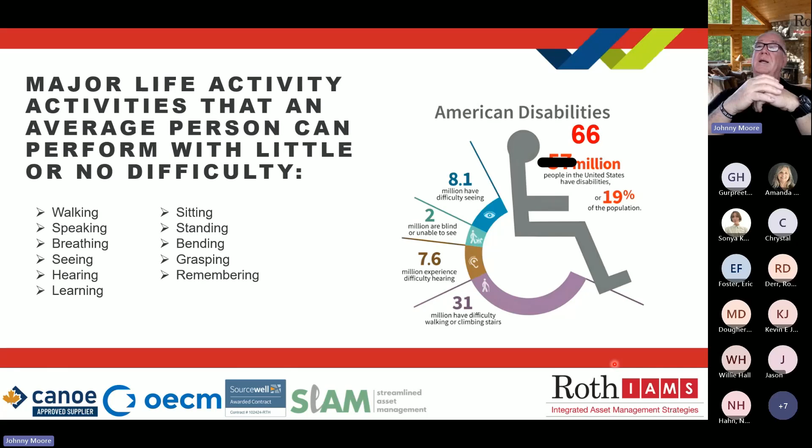Those major life activities that we all take for granted, walking, speaking, breathing, seeing, all of these, you can see there's a lot of different life activities. And if you've got a physical impairment that is limiting you, you need to have your rights protected. And it's important to understand that there's quite a few of us that have these limitations. At last count, there were 66 million people in the United States that were deemed as having some form of disability. That's about 19% of the population, and that number is growing daily.

Understanding that the U.S. Code is the code of laws in the United States that is the official compilation and codification of the general and permanent federal statutes in the United States that govern the ADA codes. The U.S. codes, there's 5 of them primarily. Again, the ones that I'm going to focus on are Title 2 and Title 3, which are basically the built environment.

This is going to be an example of some of the items that are in each one of the chapters of the ADA Bible, the 2010 ADA Standards for Accessible Design. And it's important to understand that that is the most recent code change version that we have. That's the one we are working with. Chapter 1, Application and General Scoping. It talks about the interpretation of what the ADA is. It discusses the accessibility to sites, buildings, facilities, and all the different elements.

First thing people are going to say, especially if they're responsible for a building, much less own a building, they're going to say, well, wait a minute, what about the ADA grandfather clause? I used to be grandfathered in. Well, in the old days, you did with the first ADA code that came out in 1992 and the revised version that came out in 2004. There were exclusions or grandfather clauses that said that if your building was built prior to that, you didn't have to worry about being ADA compliant.

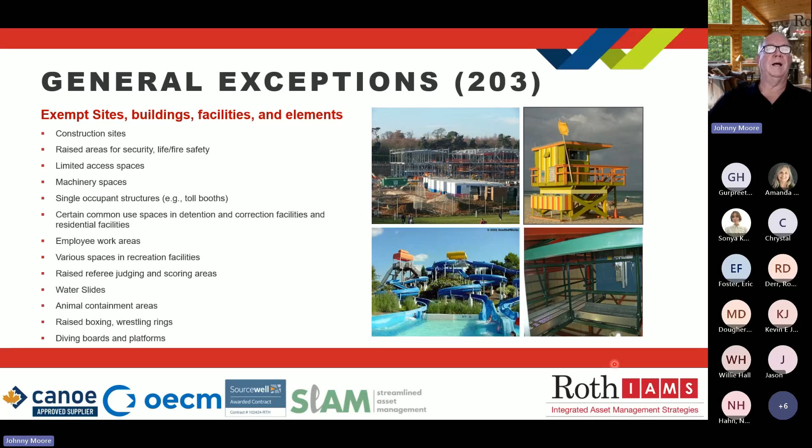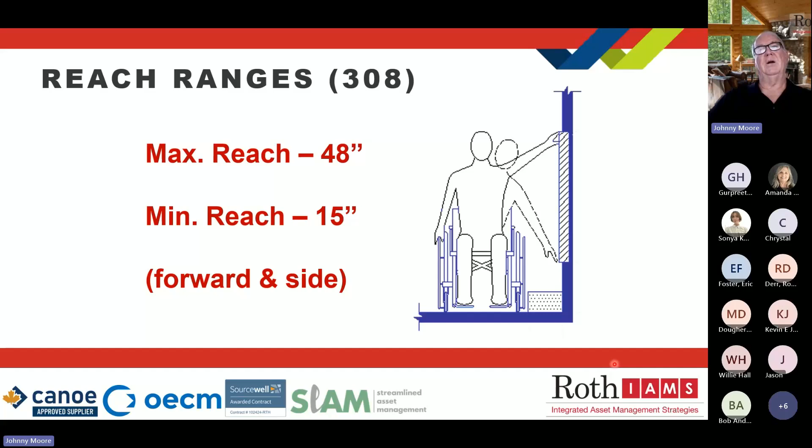There's always exceptions. Building blocks, chapter 3, they're going to talk about some of the important things like the reach range. It's important to understand that if you can learn the basic dimensions and the criteria pertaining to different code criteria items in the ADA, things like the maximum reach range of 48 inches, the minimum reach range of 15 inches, that will help you learn how to look for code items that you need to pay attention to.

There's always variations. Obviously, if you are in a wheelchair and you are in an area where you have an obstacle like a bookcase that is only 10 inches wide or less, you're going to have that maximum reach capability of 48 inches. However, if you're leaning over a cabinet or an item that's 24 inches wide, then that reach range is going to lower down. You're only going to have 46 inches.

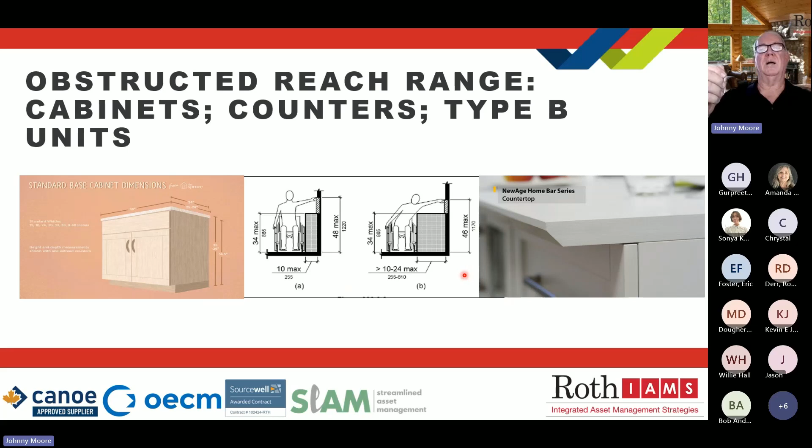Operable parts, protruding objects. They talk about the fact that if you are physically challenged in the way that you have vision limitations, then you might be using a cane. You might be completely blind. People will do what's called wall surfing. They will walk along a wall or some object that they can put their cane against and use that as a guide for walking down a walkway or an accessible route.

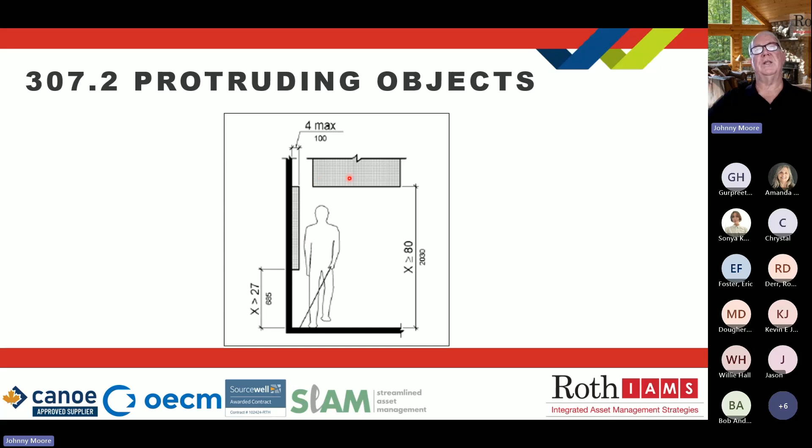If you have an object that is above 27 inches up to 80 inches and it extends out more than 4 inches, as you can see, it could hit the individual as they are walking by. That is called a protruding object. They also have protruding objects that come in the form of overhead barriers like you see here. Protrusion limits only pertain to the items that are directly in the access route.

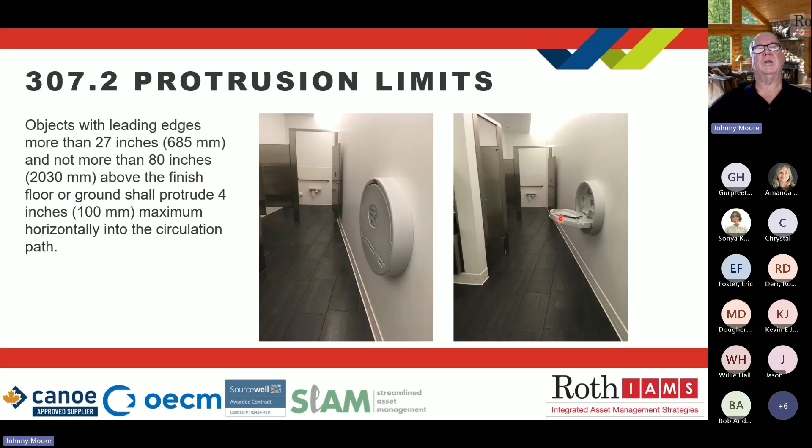So here you see a baby changing table. You say, well, that's probably less than 4 inches, so it's okay. Well, if you fold that baby changing table down, it now becomes a protruding object. So you have to really focus on a lot of these items and understand that it's not just a matter of what they are, but where they are. If they are on a circulation path in the accessible route and they stick out more than 4 inches, then that is a protruding object.

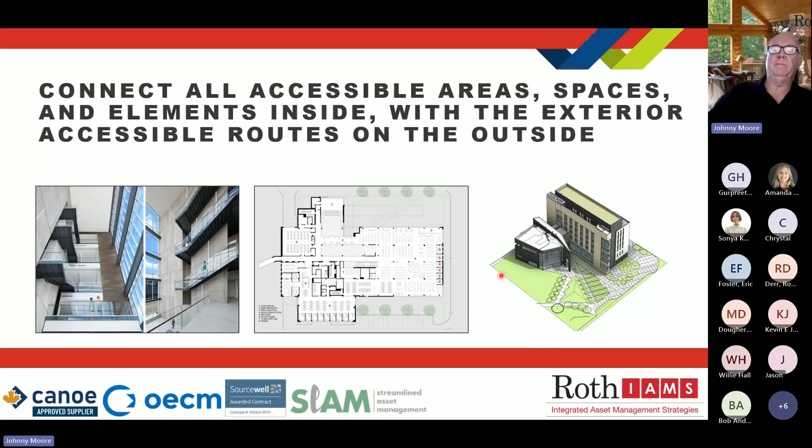Chapter 4, the accessible routes. This is where it starts getting interesting because you're trying to figure out how you're going to get the public out from the parking lot and the drop-off points of public transportation like bus stops. How are you going to get those people safely into a building or facility? When you talk about that accessible route, it has to be on what's classified as a flat, level, and secure surface. You can't have any loose areas like gravel or anything like that. You have to have a flat, level surface.

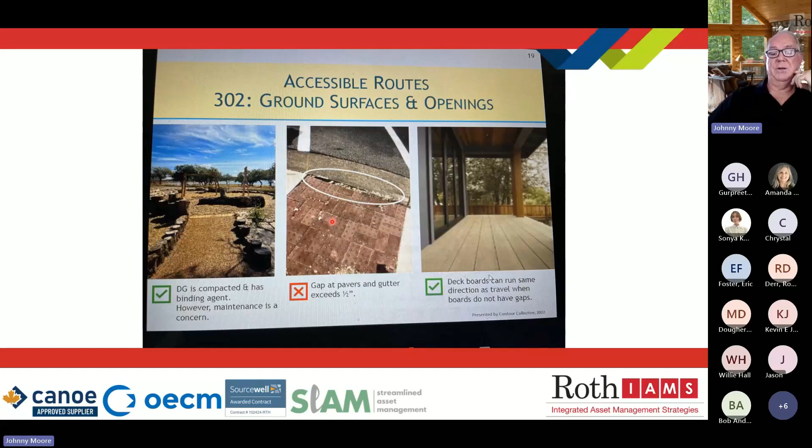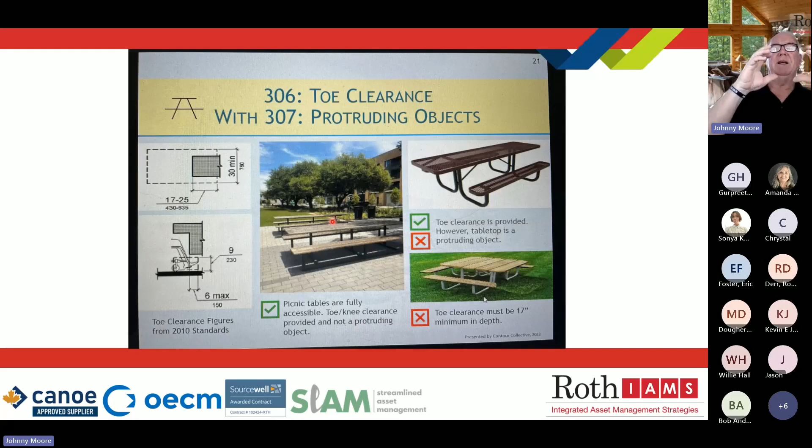You can't have grooves that exceed 1/2 inch in width. If you have gaps between different materials like the brick pavers here in this concrete strip, that is too wide. That is a gap that is not allowed. So again, all I'm trying to do here is demonstrate that there are a lot of things that you have to think about when you're looking at providing a safe, accessible route for people from the outside to the inside.

One of the things that you can do to assist you in understanding that concept is to envision being inside a big cardboard box that is 30 inches by 48 inches in width and depth, and then 84 inches in height. Basically, that is your overall safe zone. That is the clearance criteria in 99% of all the criteria listed in the ADA code.

Now imagine moving that box around a site. Try going from your car inside the building, inside that box, and think about the things that you're going to hit or that are in your way or don't provide you a flat level surface to be able to negotiate that route to the inside.

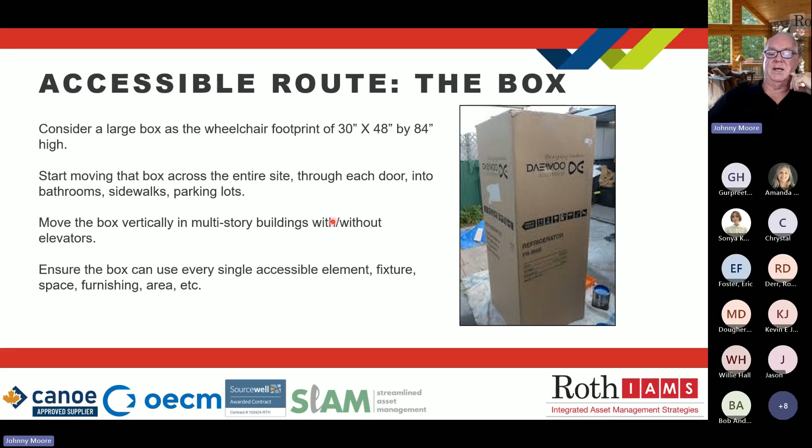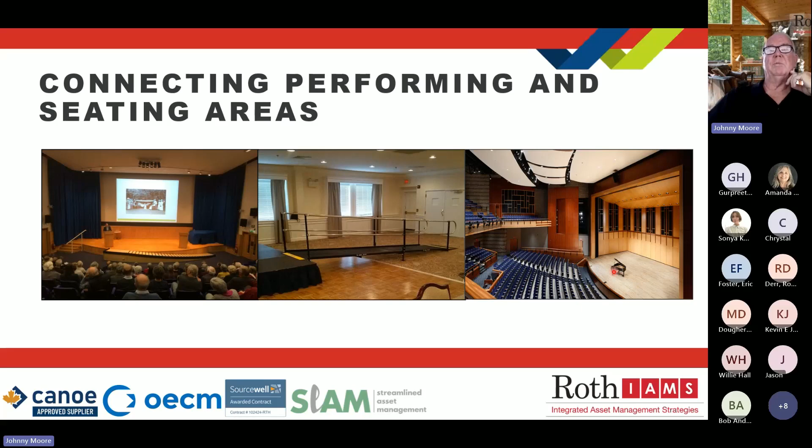Connecting performing and seating areas like arenas and theaters and conference rooms. Here you can see they've got this nice gradual slope for this ramp. They've got a temporary ramp installed here to get up onto a stage. Over here, they've got a ramp that goes beyond the seating area onto the stage. So this is providing access for everybody so that they are not cheated out of being able to attend things that you and I take for granted.

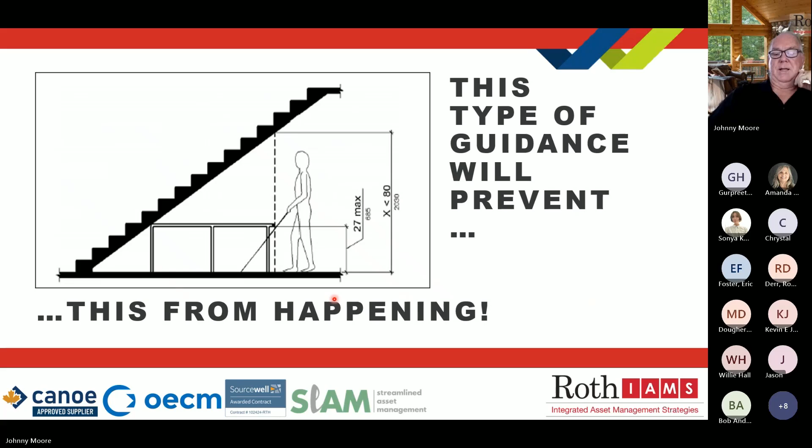This type of guidance will prevent this kind of thing from happening, understanding these criteria of having head heights so that this doesn't happen. You have to have some kind of a clear zone here that's out far enough away so that you won't hit your head on overhead obstacles.

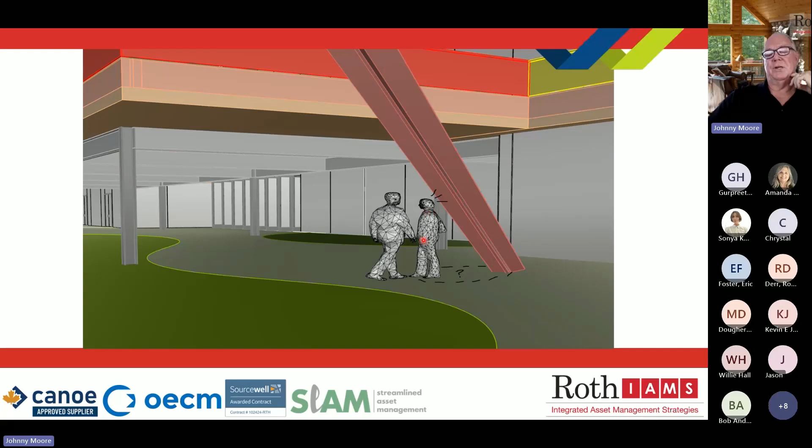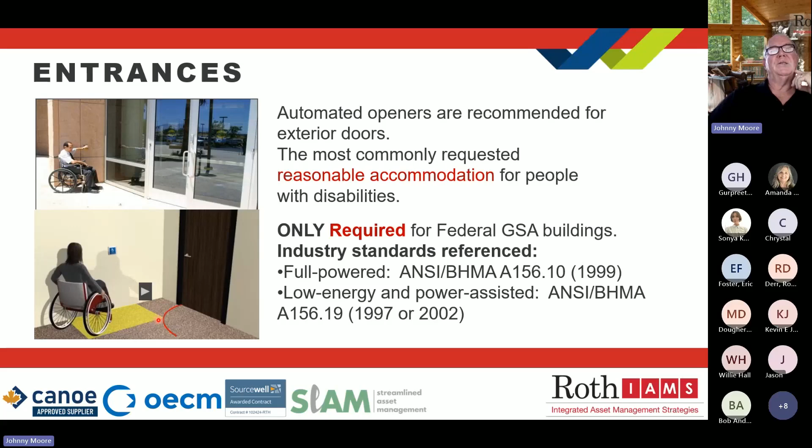Entrances. Automated openers are recommended for exterior doors. They're most commonly requested as reasonable accommodation for all people with disabilities. And again, if you start looking at these things, you're going to notice here they've got this highlighted area in yellow. Guess what size that is? It's 30 by 48. Like I said, if you remember some of these numbers, you're going to see that it applies in a lot of different situations. Automated doors with entrances. There's our footprint, 30 by 48.

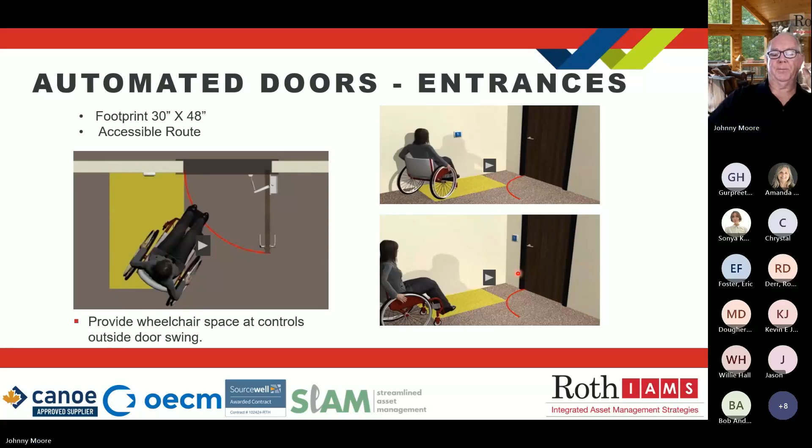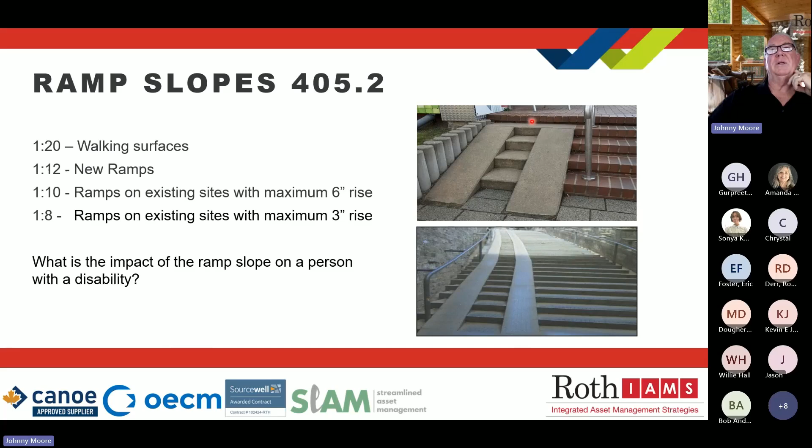Ramps and slopes have very specific criteria as far as the amount of degrees that you're allowed to have in a slope. But a lot of times when you start looking at the ADA and the built environment, you're going to realize that 99% of the time it's a matter of just applying common sense. It doesn't take a rocket scientist to look at this particular ramp. They're trying to help the ADA, giving them a ramp to negotiate these stairs. But if you understand the slope of stairs, you understand that this slope is a lot more than 1 in 20. Same thing with this ramp. And if you do negotiate this ramp, what happens at this last step? You've got to think about these kinds of things. And this is what you find out in the real world.

Here you've got curb ramps. Curb ramps lead from an accessible route past a curb. Well, you can't have an obstacle like this grate here, these wheelchair catch-alls, to stop that person trying to get into this crosswalk to cross the street.

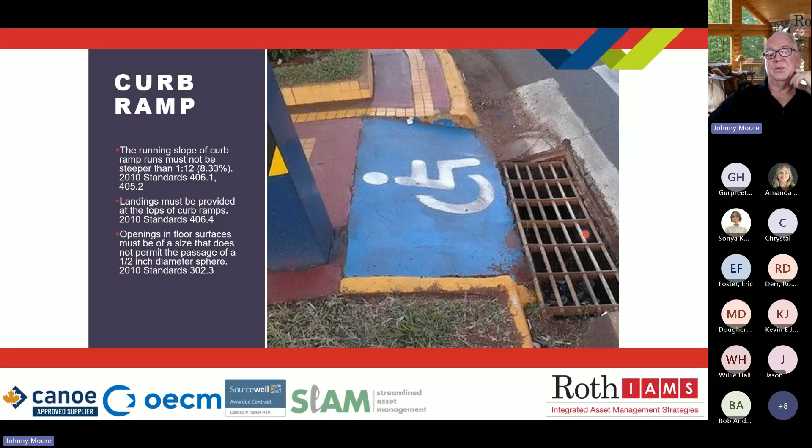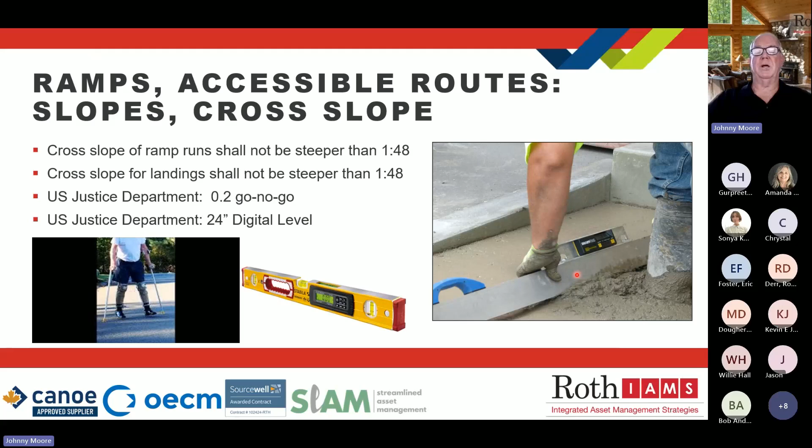Ramps, accessible routes, slopes, cross slopes, they can all be measured with a digital level. And that's because you have specific measurements: 2.08% slope maximum for a cross slope in accessible routes, 5% on the running slopes on those accessible routes. Here you see a contractor that's got one that's magnetized, stuck to his screed when he's putting in the concrete, to make sure he follows that slope criteria. These are all very important things that you have to think about.

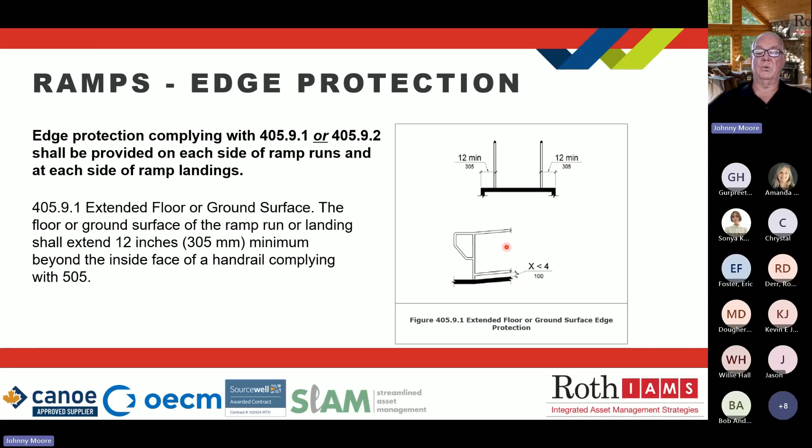Edge protection on ramps. You've got handrails. They have specific criteria as far as height, size, spacing. If you have a handrail like this on a ramp, you cannot have a ramp that does not have some kind of edge protection. The primary two edge protections are a lower bar that is no more than 4 inches above the ground so that the front wheels of that wheelchair can't run off past that. If you don't have that bar, you have to have at least 12 inches to the edge of the ramp. By doing that, it makes this particular ramp code compliant.

But there are also things called landing zones or landing strips, landing areas. When you come up this ramp, you have to be able to come up to a flat level surface without having to try and turn, because trying to negotiate turning while going up this slope is just an accident waiting for this individual to tip over and fall. You also have parallel curb ramps. This is where this walkway comes up to a flat level surface, and then you can turn left or right and go up two separate ramps. As long as they don't have a slope over 1 in 12, you're good to go.

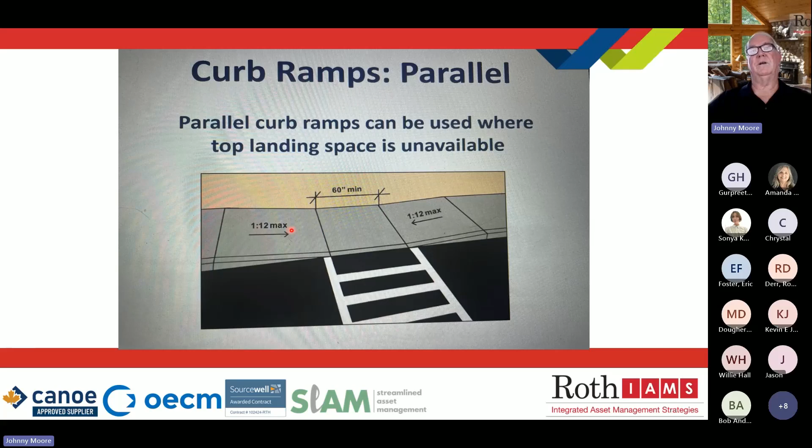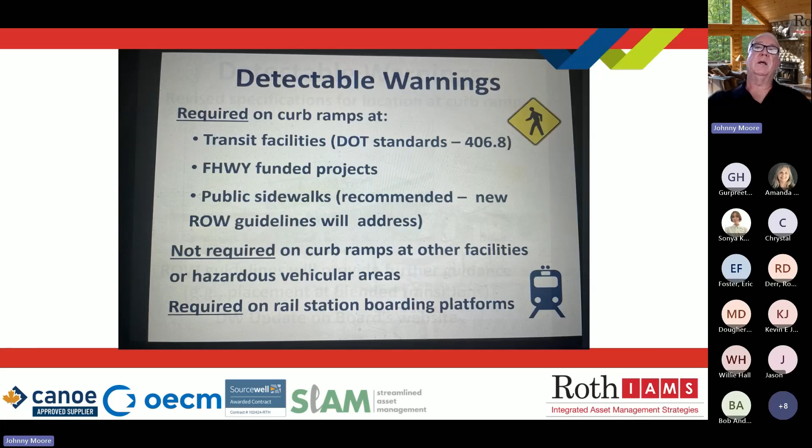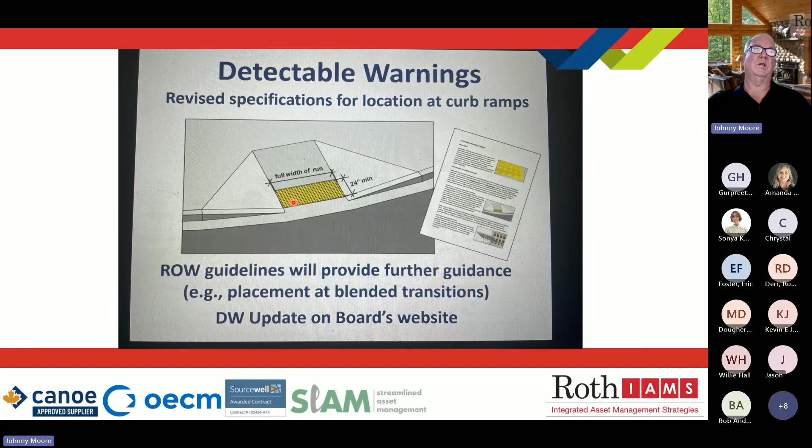Detectable warning strips are on curb ramps, and those are those generally bright yellow pads that have the raised dimples, which all have a specific criteria. They generally have to go across the width of the opening. They have to start 6 to 8 inches from the edge of the curb, and they have to be at least 24 inches deep. These are not required by code at this time. However, the right-of-way guidelines are recommending them strongly, and it has been pre-approved that these detectable warning strips will become mandatory on the next code change, which at this time we don't know when that is.

Chapter 5, General Site and Building Elements. This is where you get into your parking, and this again is something that's very important for you to pay attention to. There's a lot of different conditions and situations. Normally accessible parking spaces have to be 8 feet wide.

You have to have a 5-foot wide accessible path adjacent to it, and it can be on either side. It doesn't have to just be on the right side, because now they've got cars that will offload on the left side. Vans have to be 8 feet wide, but you have to have an 8-foot wide adjacent accessible path and route adjacent to it. However, if you have an 11-foot wide aisle, you only have to have 5 feet.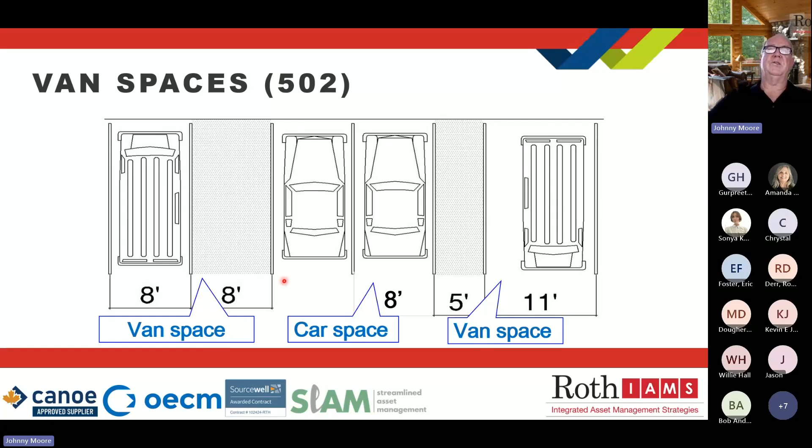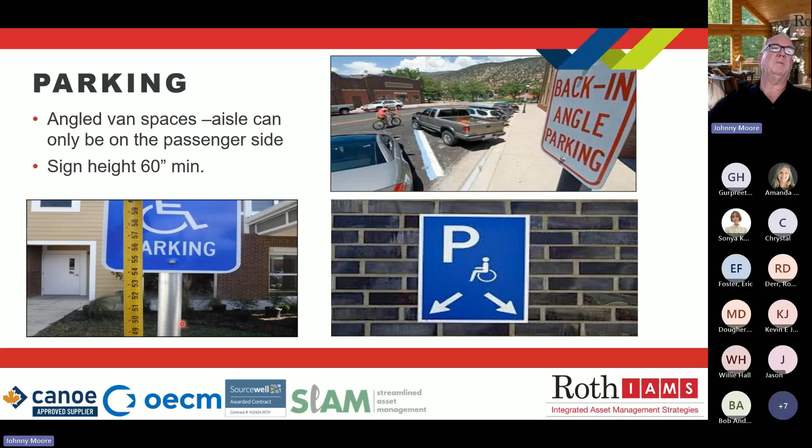There's a reason for marking the accessible aisles. This is not it. We put a barber pole indication there trying to indicate that there's no parking there, but you can't put anything beyond people these days. They don't understand. We have specific criteria for the parking signs. They have to be a minimum of 60 inches to the bottom of the sign. If you have a van accessible space, there's a small van sign that goes underneath this, but now that means the whole thing has to raise up so that 60 inches is the minimum height to the bottom of that van sign.

The access aisles are adjacent and adjoin the accessible route. They normally have to be the full length of the parking space. They have to be 60 inches wide. They can't have any changes in level that are over 1 in 48. They're marked to discourage the parking. You can't help this situation. All you can do is mark it and hope that people understand that they're not supposed to put anything there. The people who understand that mostly are the people who are physically challenged or have a family member or friend who are physically challenged, and they see the difficulties they have. If you want to learn how difficult it is, just go to any public place, find someone who is physically challenged, and just lay back and watch how they negotiate the built environment. It is very, very challenging.

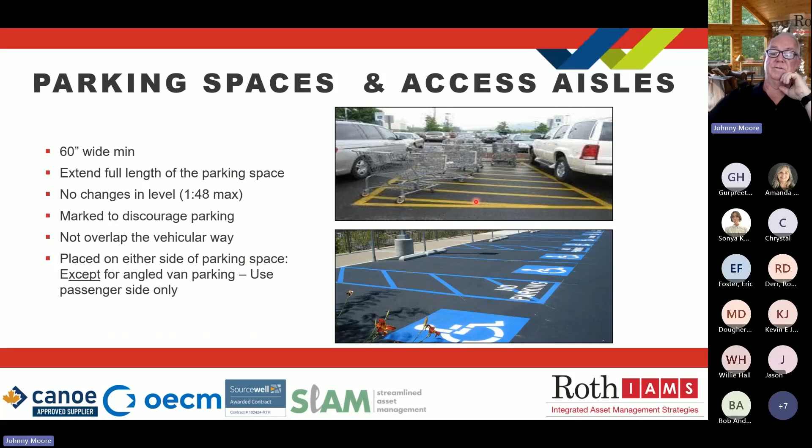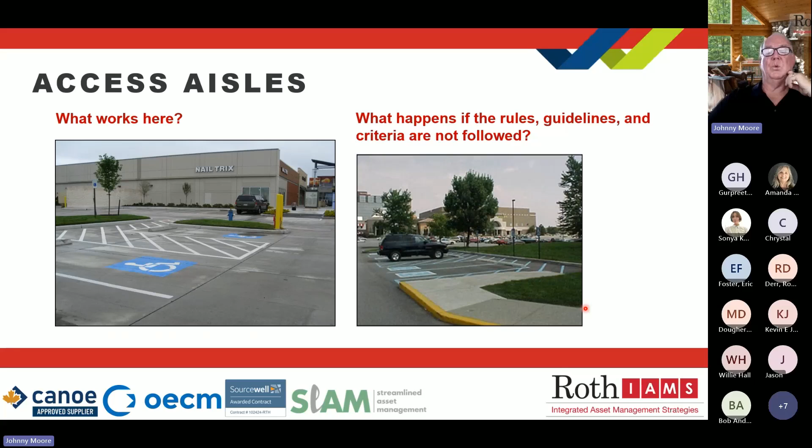Access aisles, what works here? Well, you've got an access aisle here that is shared between the two handicap spots, and it has a marked area that goes across over to the building. Over here, you've got all these access aisles that come to one long one that comes up here to this ramp up to the sidewalk. Those are things that work very well. But if you don't follow these rules and guidelines, you're going to have accidents. And you don't want to see anybody have an accident, but especially someone who's in a wheelchair. That's just not a pleasant thing to think about.

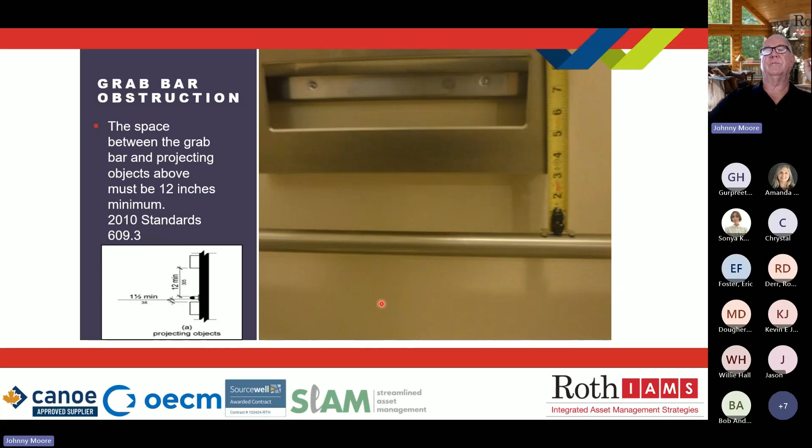Grab bars, they have very specific criteria too. I did an inspection on a facility once. They said they wanted me to check out their accessible parking spaces. I said, well, while I'm here, how about if I check out your bathroom? They said, no, we're opening tomorrow. We've already built it. We had an architect design it. We know we're good. And I said, well, I'm here. Let me just go on ahead and take a look at it for free. And they said, okay, go ahead. So he thought that his bathrooms were in perfect ADA compliance. I went in there and found 33 violations. Just saying, there's a lot to pay attention to.

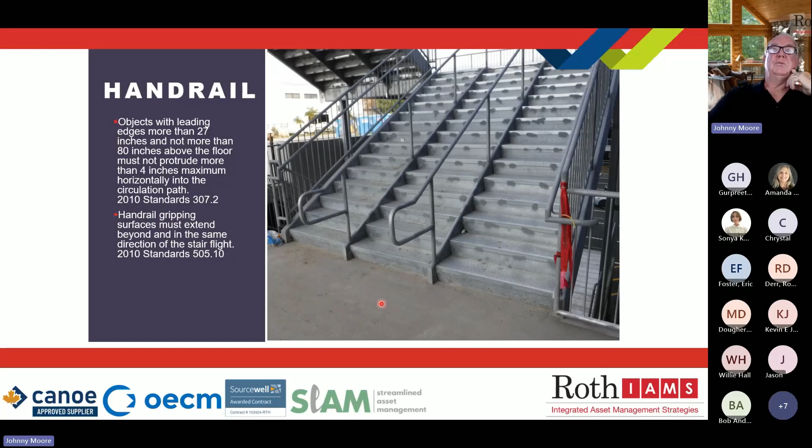Handrails, they have to extend at least 12 inches beyond the top and bottom step. This does not make it.

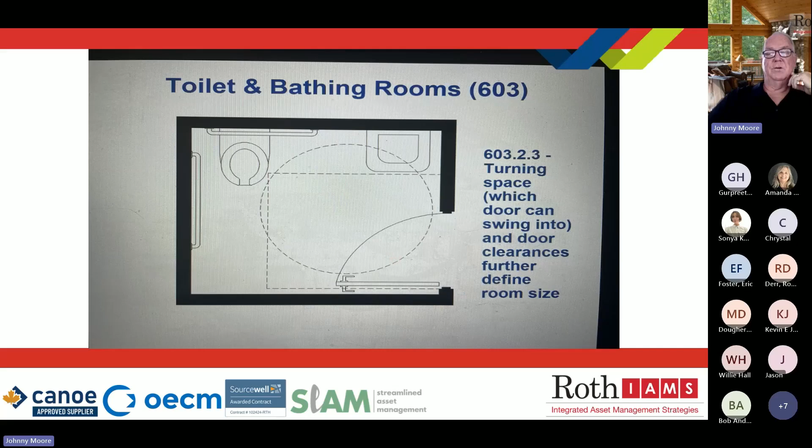Chapter 6, Plumbing Elements and Facilities. This is where we're going to start getting into our toilet and bathing facilities. In the old days, they used to just have a 60-inch turning radius. They thought that as long as you had a 60-inch turning radius, you could negotiate with a wheelchair and were in good shape. Now they've realized that because of space constrictions and restrictions, it's become more challenging. So they've added what they call the T-shape turning space. The theory behind this is that you can turn in here, back up, and then pull back out again.

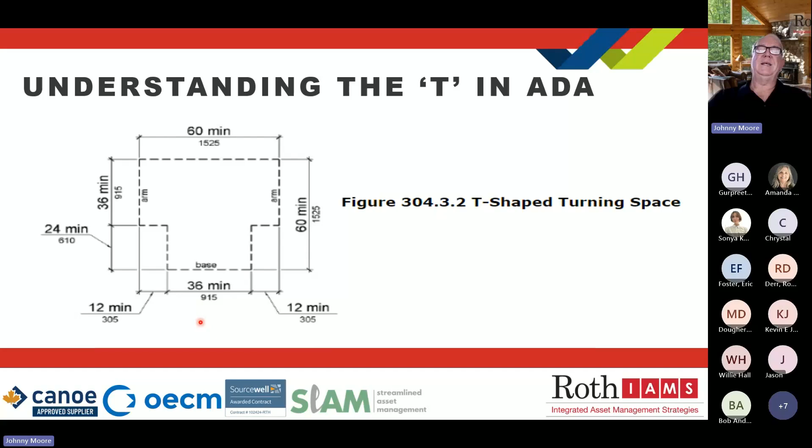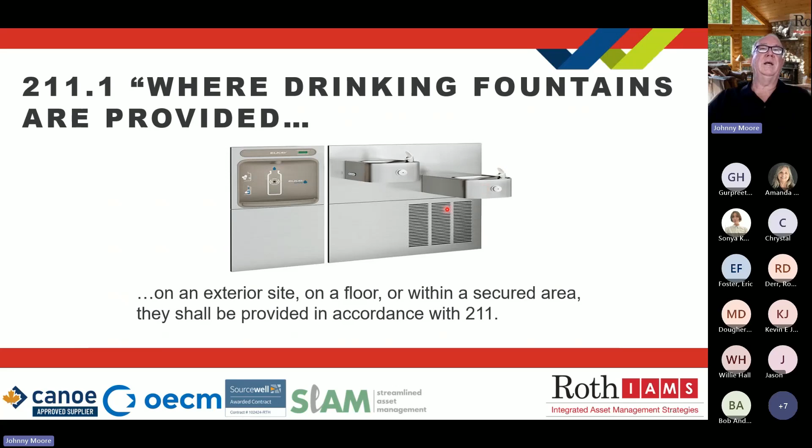So the T in ADA is now an option. Children's toilets, they have their space and height and size and location criteria. Where drinking fountains are provided, that has always been fairly easy to see and notice these days. They always have two of them side by side, typically, the one lower for the ADA. But now they also have drinking bottle locations because everybody seems to be drinking out of water bottles. So they have these bottle filling stations, and they're like everything else, they have specific criteria that come into play.

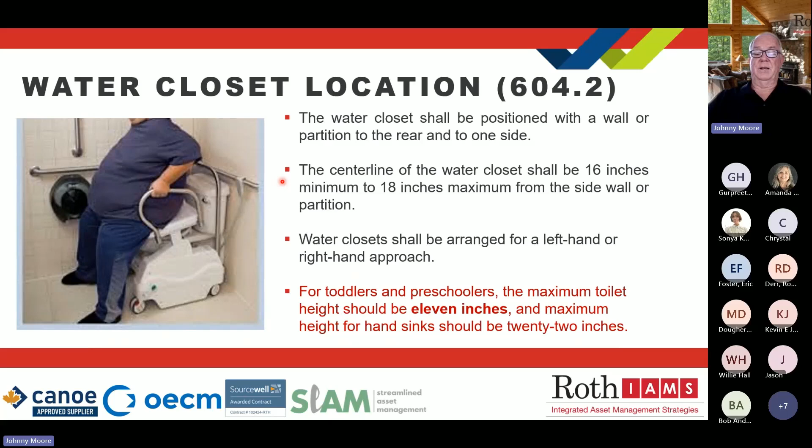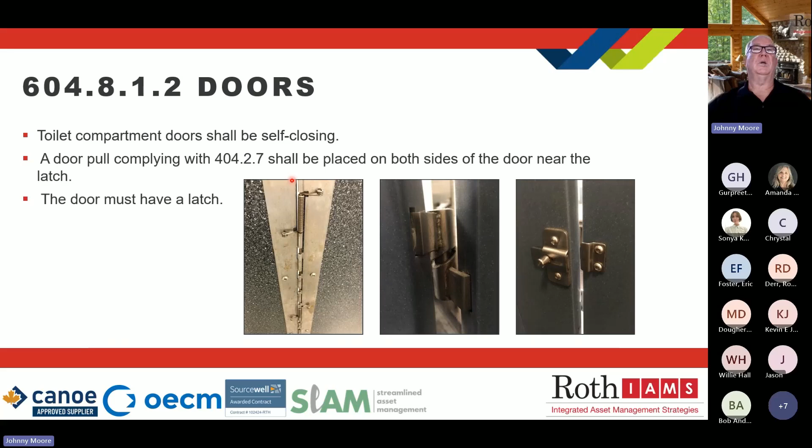Water closet locations, these are very specific. They have to be located 16 to 18 inches to the center line from the nearest wall on the side. I just got done having an old client call me up saying they had a new facility they wanted me to look at. I told them I didn't do that anymore. They said, well, it was something simple. They said they had someone go in and file a lawsuit because they were 18 and 1/8 inches away from the wall. People, I don't make this stuff up. It's something that's real, and it happens every day.

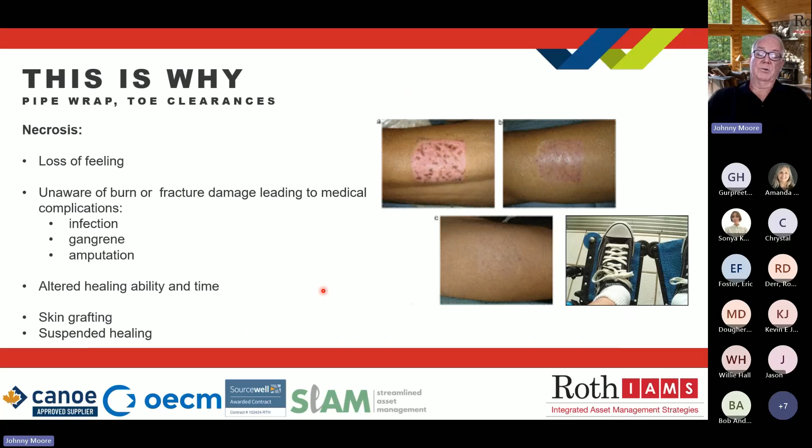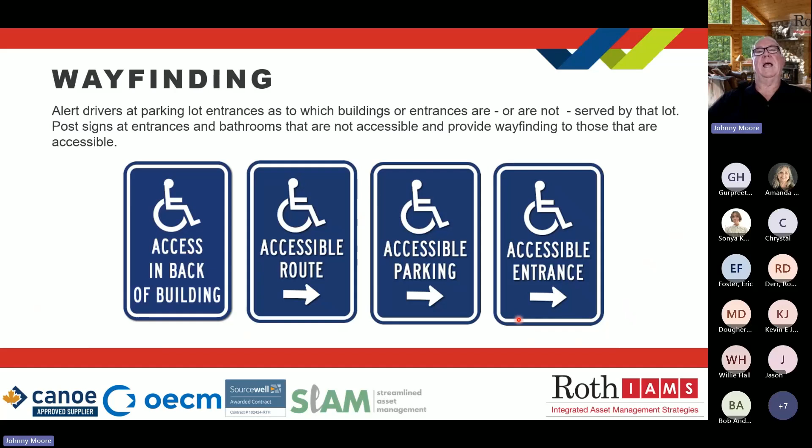Communications. A lot of times, wayfinding signs are a saving grace for you because there are certain clauses in the ADA code on certain elements that say you have to have this particular thing identified. If you don't have access, you need to at least have wayfinding signs that say, hey, you've got handicap access in the back of the building. Here is the accessible route. Here is the accessible entrance. If you have these wayfinding signs, it's a pretty cheap way of fixing a particular problem if you don't have that accessible entrance, for example, right at the location that leads from the parking lot to the building.

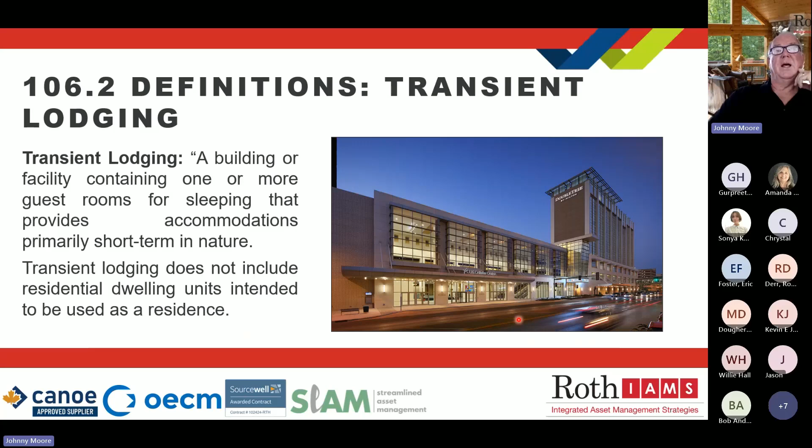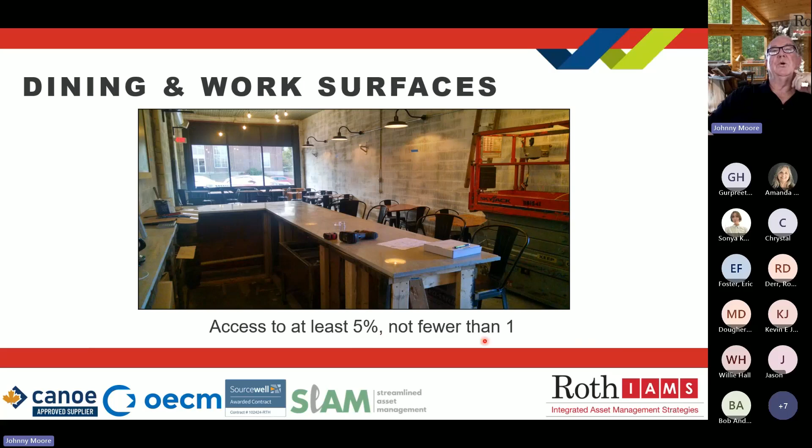Special rooms and special elements, they get a lot into transient lodging. There's a lot of specific criteria there. Built-in elements in these buildings. There's a lot of different criteria as far as the spaces that have to be handicap accessible, there's guidelines, at least 5%, but not fewer than one. The tables have to be ADA compliant. The counters have to be ADA compliant. You've seen this probably where they'll have a lower section in a counter so that someone can wheel up alongside and write a check or hand them a credit card, that kind of thing.

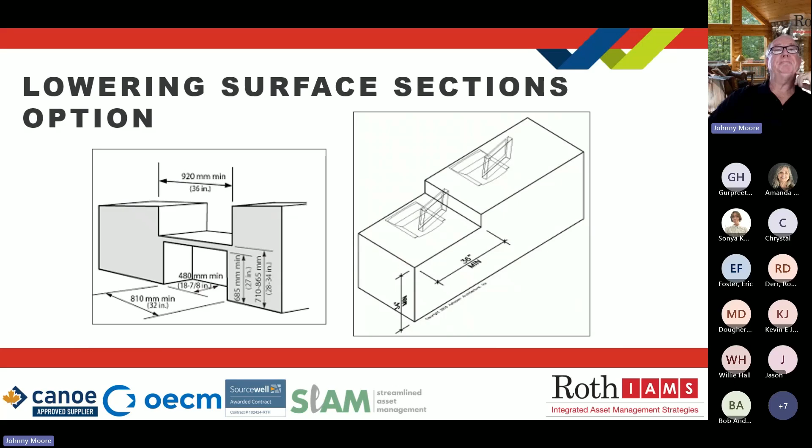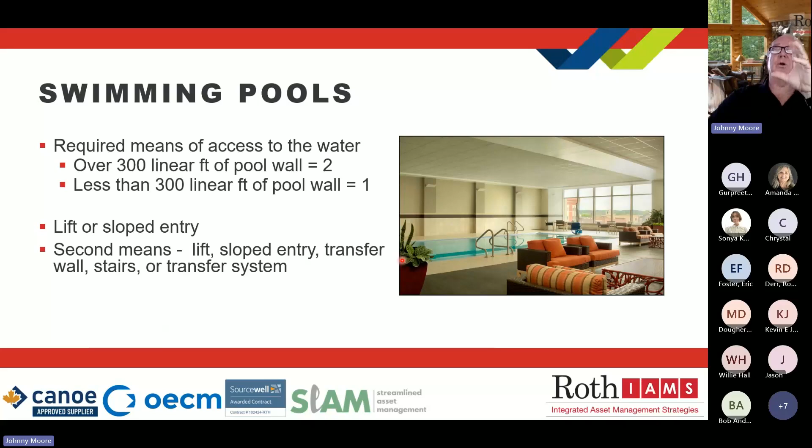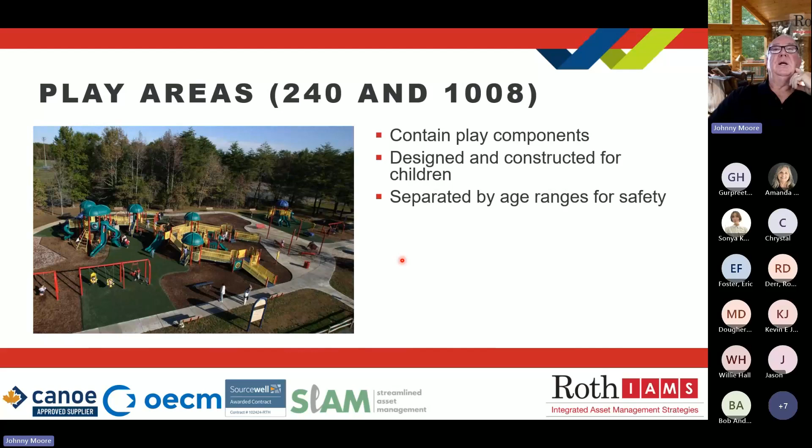Recreation facilities are the same thing. They've got a lot of specific criteria that come into play here. They talk a lot about safe harbors. Elements that do not benefit from safe harbors are listed here: play areas, swimming pools, miscellaneous, team or player seating. Swimming pools have very specific criteria. It's not just a matter of having a chair lift to lift someone out of their wheelchair and set them down into the water. They can have sloped entries inside the pool. It's like an underwater ramp if you're not aware of those. Play areas, they get into a lot of the criteria there. You have to determine if your playground equipment is ground level or elevated. There's criteria that list what those are.

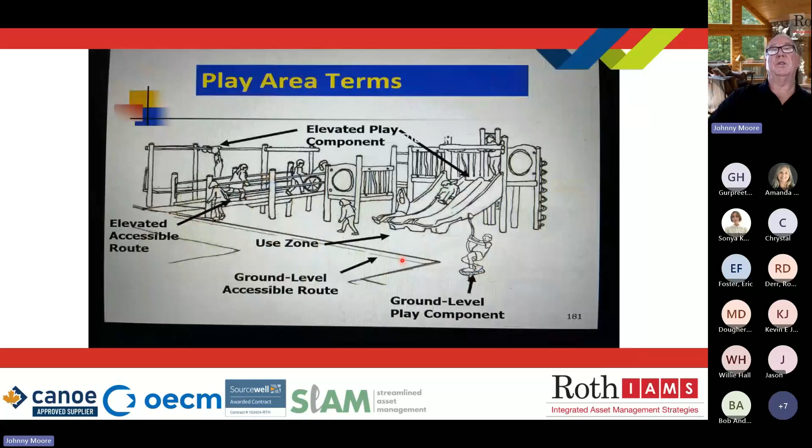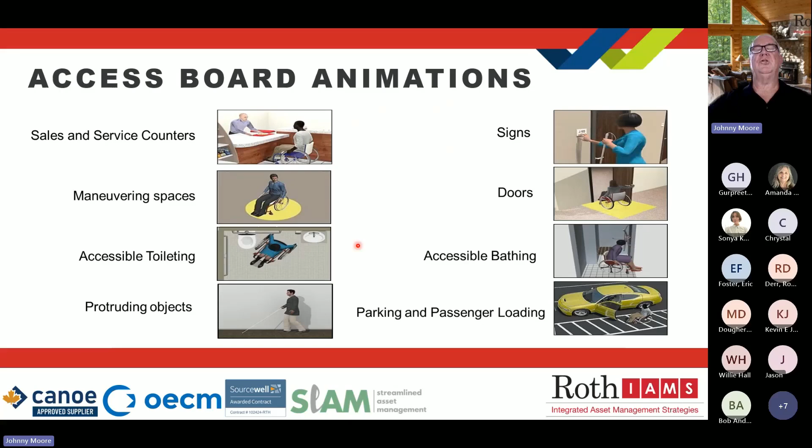Then you get to the end, and it's good to know that if you are going to be a facility manager or someone who's in charge of their building and you want to start looking at the ADA and understanding, and you're more of a visual person, they do have animations that were produced by the U.S. Access Board, and you can look these up online, and they are 5 to 8 minute videos that talk about all these different things: what maneuvering spaces are, accessing toileting fixtures, those protruding objects I mentioned, parking, accessible bathing, doors. All of these are items that you can look up and watch the video yourself anytime you want.

Finally, we have some ADA fails. These are pictures that I've acquired over the years. They are not hard to see. They are not hard to understand. But it's amazing when you go out there and you see these things.

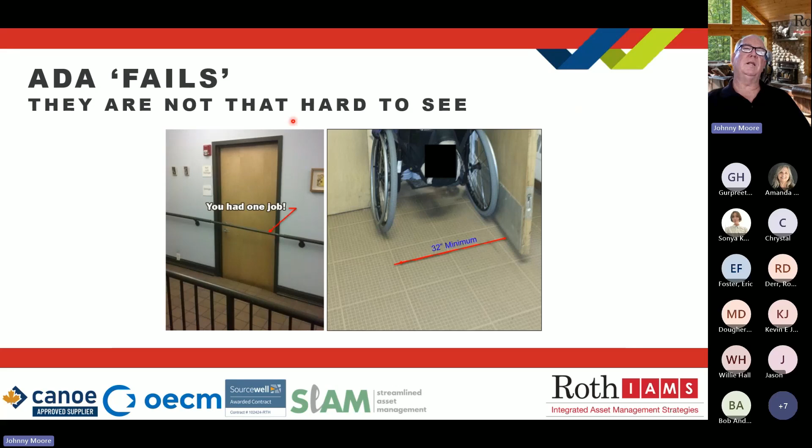So here we had a tenant that had a couple of offices and they wanted to block this door off. They said it wasn't important, so they went on ahead and let the building people put in a handrail across there. And I said, well, what are you going to do if you leave and the next people want to open that door up? You know, you have to think about these things.

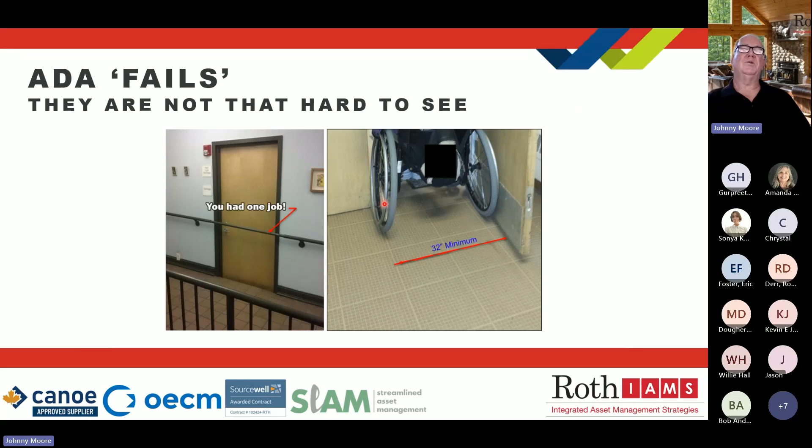Minimum widths into doorways. They've got that minimum width for a reason. These wheelchairs have a certain size. They need to be able to get through there.

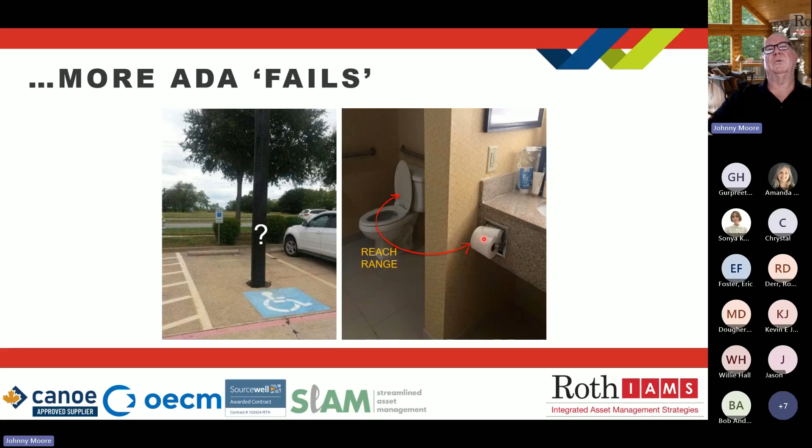Reach ranges, common sense. I don't know. You'd have to be Kareem Abdul-Jabbar to be able to reach this toilet paper holder. Again, going up a little curb ramp into a pole. I don't know. These are real pictures. These are not photoshopped. Again, the reach range. I've got pretty long arms, but I don't think they're that long.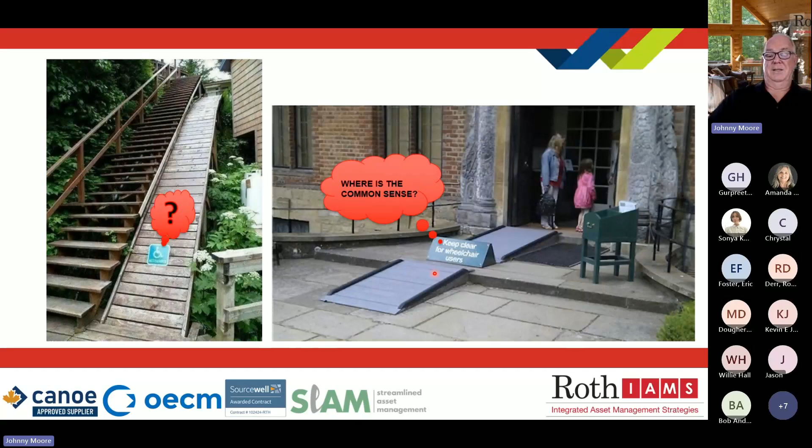Here, they at least made an attempt for a minute. They put in the temporary ramps here to get up these two steps, but then they put in this big sign here, keep clear for wheelchair users. I don't know, folks. That's common sense. And it never ends. I used to find these every single day on all my jobs.

You know, here it would have been a lot better to either put in a temporary ramp that went right up the center that had a nice flat landing area, or a wayfinding sign that says, hey, go around to the back of the building.

So understanding all these different complexities and code criteria is to make you understand that there are risks, and these risks usually manifest themselves in the form of lawsuits. Title II and Title III specifically prohibit places of public accommodation from not providing the safe usage of these buildings and access to them for people with disabilities.

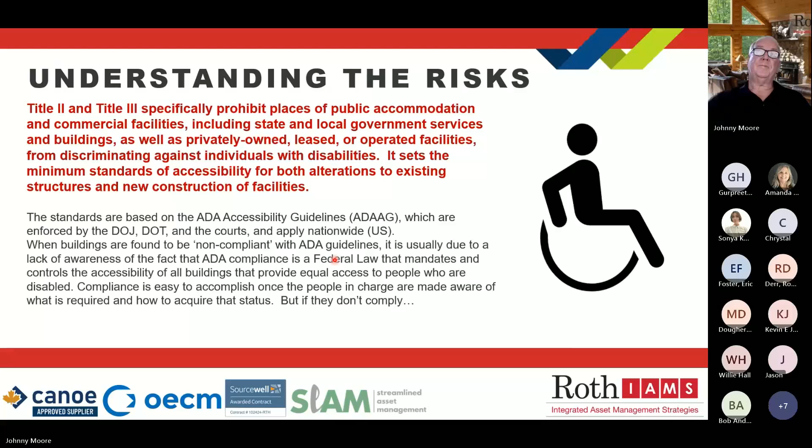The standards are based on ADA guidelines, what we call the ADAAG, which are enforced by the Department of Justice, the Department of Transportation, and the courts, and apply nationwide. So, what are the risks of not being ADA compliant? Well, the current greatest risk is litigation based on the violation of people's civil rights.

These people with disabilities. There are Department of Justice fines and penalties that are assessed for violations, and they range from $75,000 for the first offense to $150,000 for the second and all subsequent offenses.

Okay, the last job I did before I came to Roth, I found a job that had a lawsuit that I ended up having to provide expert witness testimony in, and they had 18 violations. Okay, $150,000 times 18, that's a lot of money.

Missing or non-compliant signage is the number one violation found throughout buildings in the built environment these days. All you got to do is put up a couple of $15 signs and it alleviates a lot of your problems. There were over 11,472 ADA lawsuits in the United States in 2023, and this number just keeps going up every single day.

So, what are the risks of not being ADA compliant? Well, you've got the lawsuits to contend with. You've got the fact that you could be the one responsible for someone getting hurt, maybe someone you know, maybe a family member or friend, because your building wasn't ADA compliant.

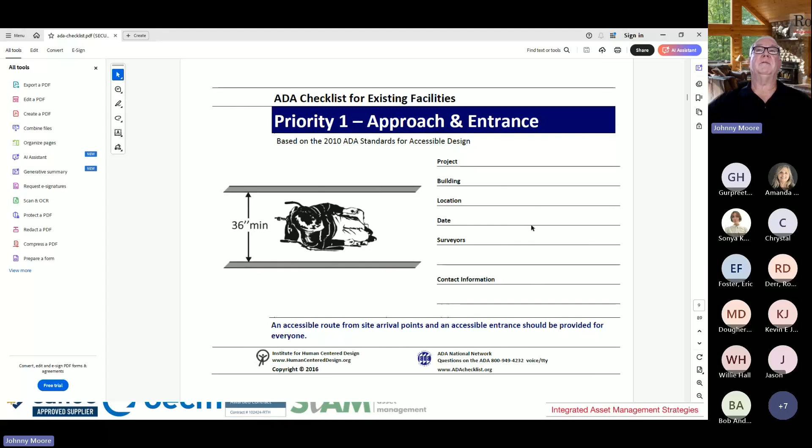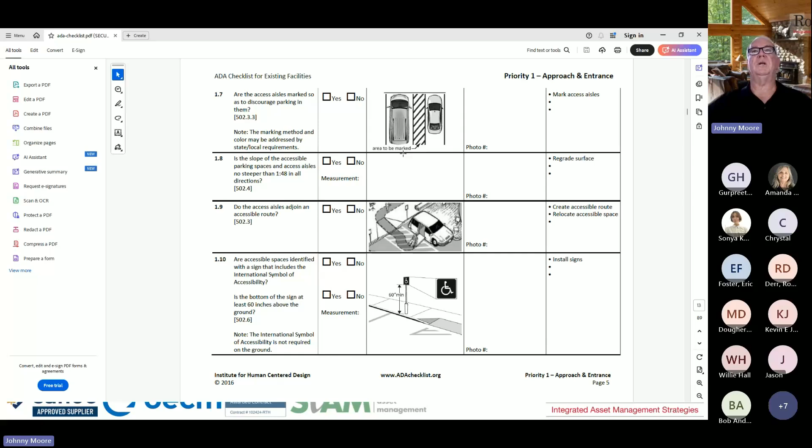Here is an example of an ADA checklist that is provided free of charge online. We can get you a copy of this. It talks about all the different criteria. Here it shows you the different criteria for parking spaces. Is it accessible, yes or no, based on the description? You can put in photos. You can look at the criteria to fix this particular item, and it goes through everything in the code that you need to be aware of, everything that you would need.